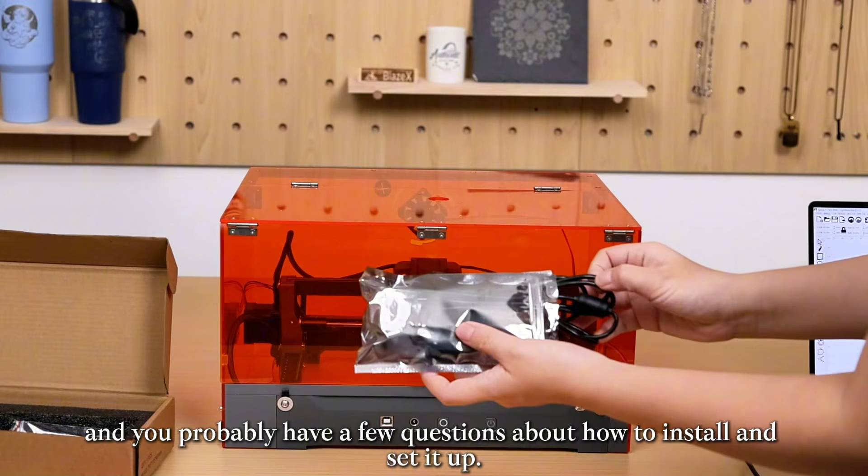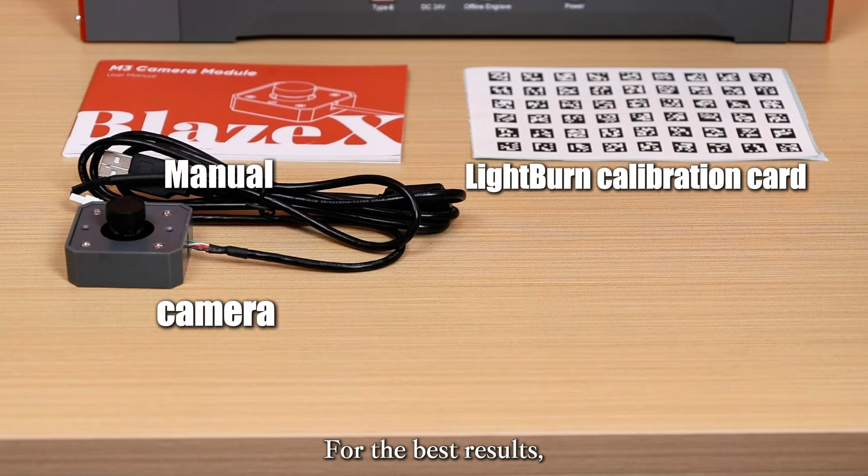By now, you should have received your camera, and you probably have a few questions about how to install and set it up. So today, I'll show you how to install, connect, and calibrate your camera. Let's get started. Before we begin, prepare a camera, a USB cable, and a LightBurn calibration card. For the best results, we recommend a calibration card around 4 by 6 inches.

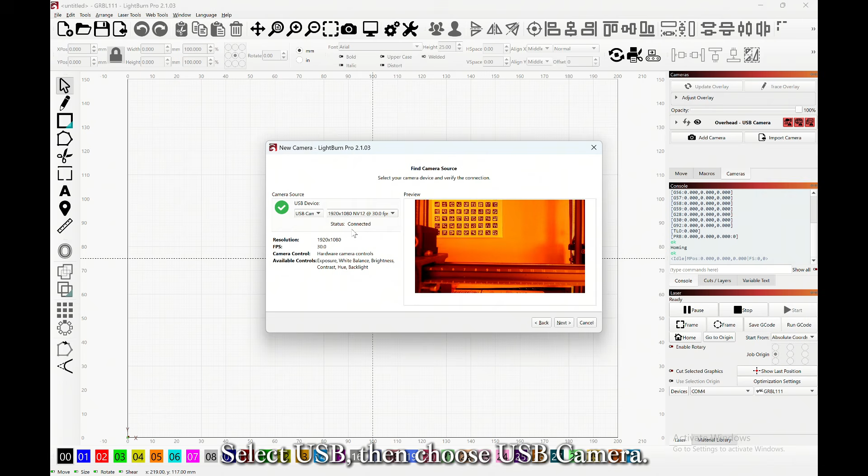First, mount the camera onto the machine and connect it to your computer with the USB cable. Open LightBurn and make sure you're using the latest version, LightBurn 2.1. Go to the camera panel and click Add Camera. Select USB, then choose USB camera. Once you see the camera feed, click Next.

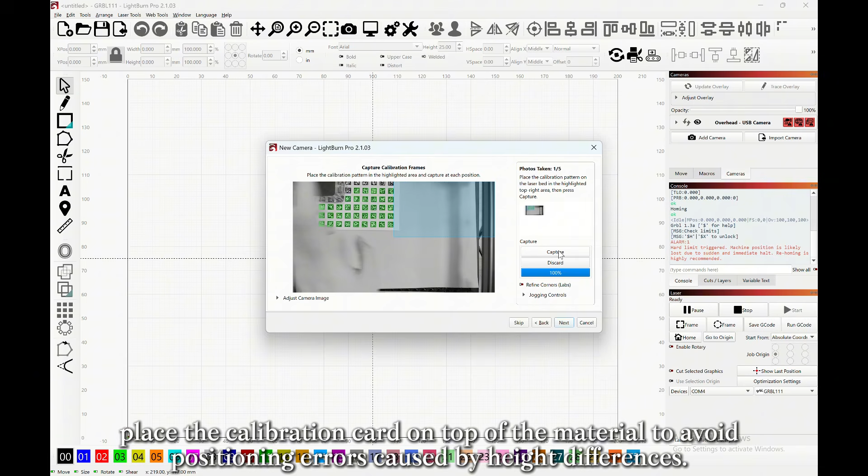Then select Create New Lens Calibration and follow the instructions. You can also click Print Calibration Card if you need to print one. If your material has some thickness, place the calibration card on top of the material to avoid positioning errors caused by height differences. For thin materials like craft paper, you can place the card directly on the honeycomb bed.

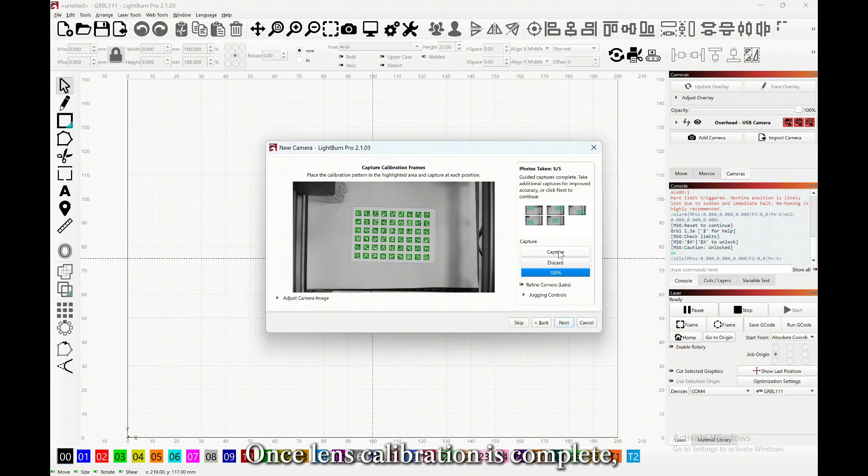Follow the positions shown on the screen and place the card in each area, then click Capture. Make sure the camera can clearly detect the calibration pattern. If it can't, the capture button won't be available. Once lens calibration is complete, we need to align the camera view with the laser position. LightBurn offers two options, automatic alignment and manual alignment.

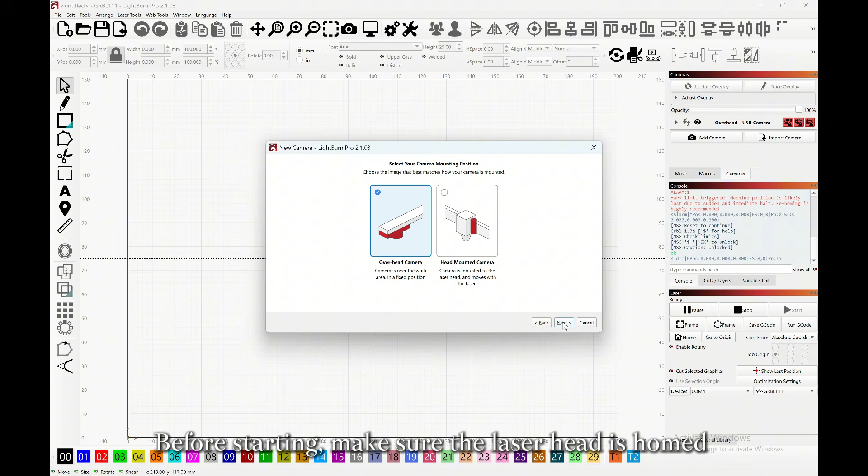Next, select Standard Camera Model, click Continue, and choose Overhead Camera. Before starting, make sure the laser head is homed and the coordinate mode is set to absolute coordinates. This is important for accurate positioning. For a faster setup, let's use automatic alignment. Click Automatic Alignment. LightBurn will engrave 4 alignment points: 1, 2, 3, and 4.

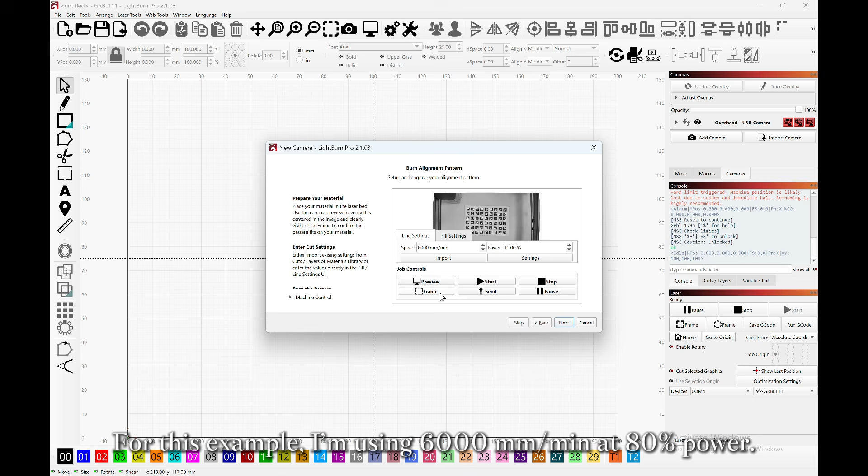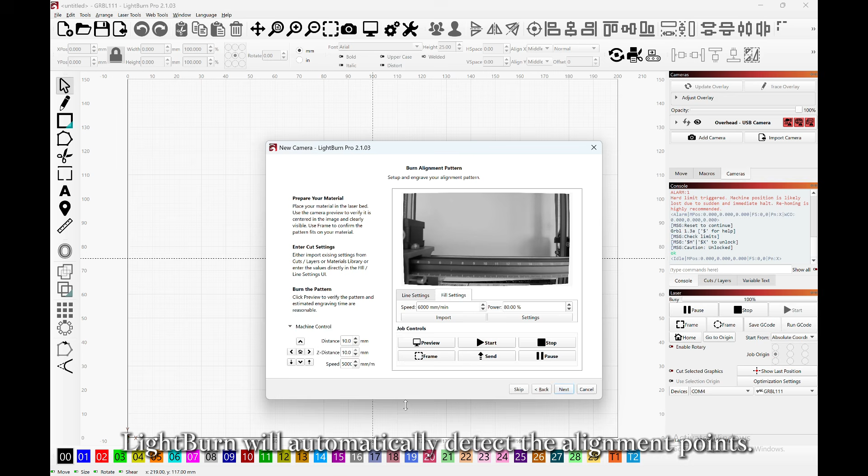Adjust the speed and power based on your material. For this example, I'm using 6,000 millimeters per minute at 80% power. Also, set fill settings to match line settings, so LightBurn can recognize the alignment points more easily. Click Home, then Frame to check the engraving area, and click Start. Once the engraving is finished, LightBurn will automatically detect the alignment points. And that's it, your camera alignment is complete.

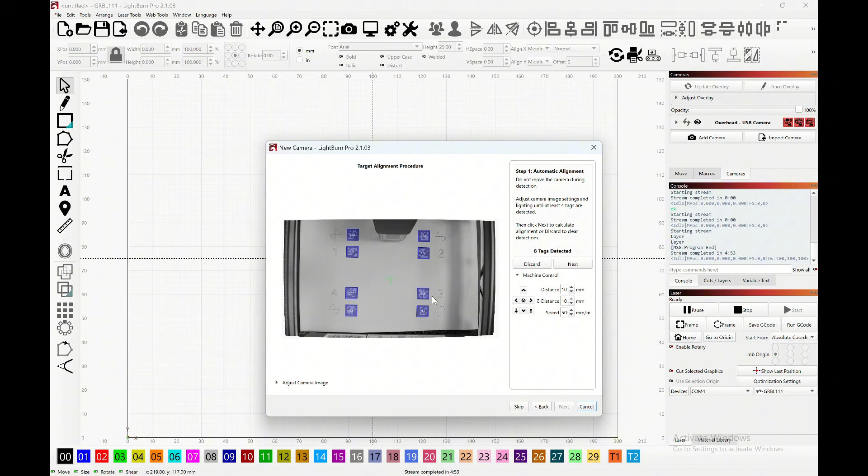Let's test it with a simple square. Adjust the parameters and start engraving. And look at that, a perfect match.

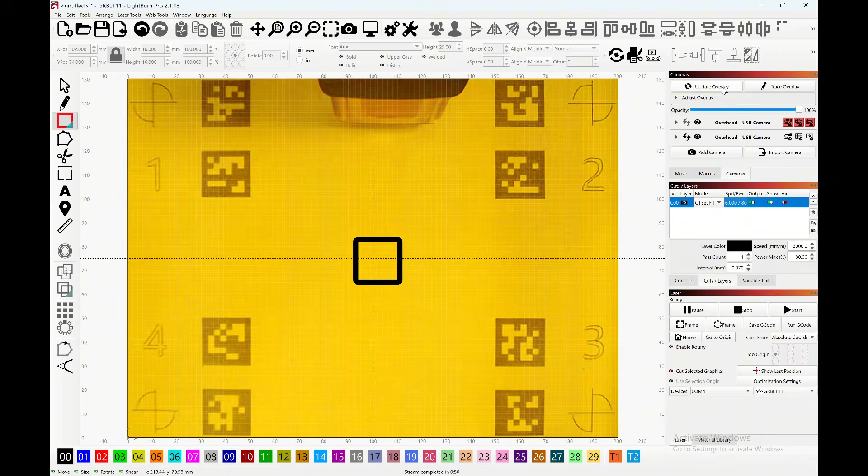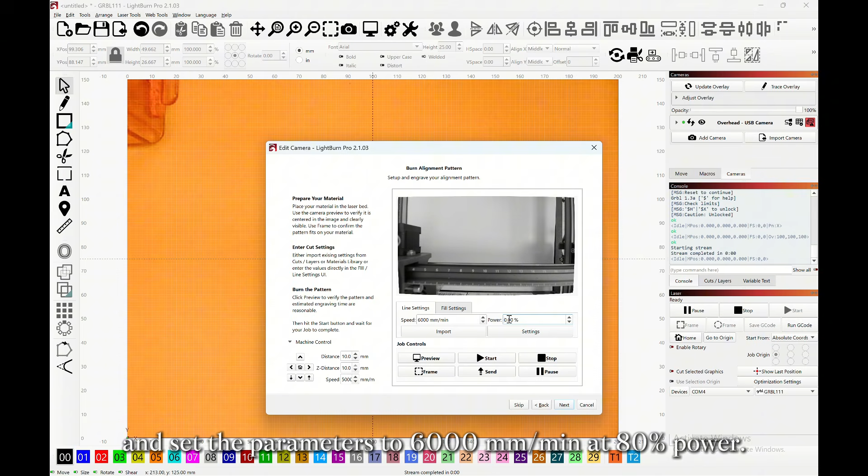You can also choose manual alignment. First, engrave the 4 alignment points. Click Home, preview the engraving position, and set the parameters to 6,000 millimeters per minute at 80% power. Then start the engraving.

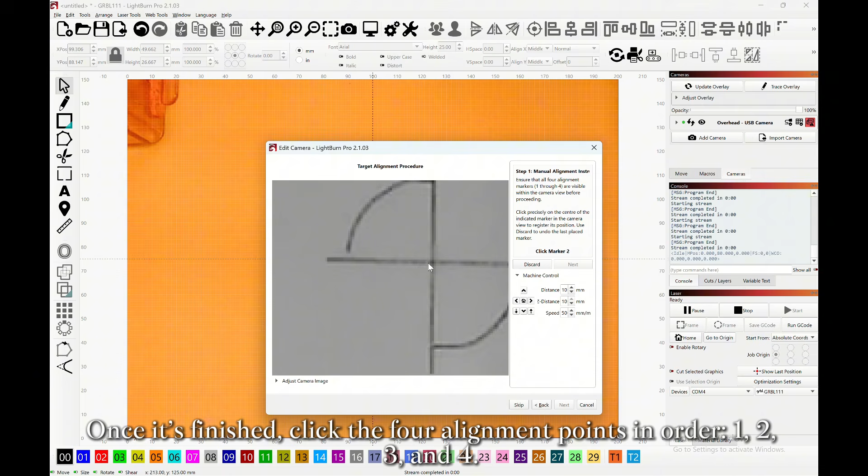Once it's finished, click the 4 alignment points in order: 1, 2, 3, and 4. Make sure each point is clearly visible in the camera view. Once all 4 points are selected, the alignment is complete.

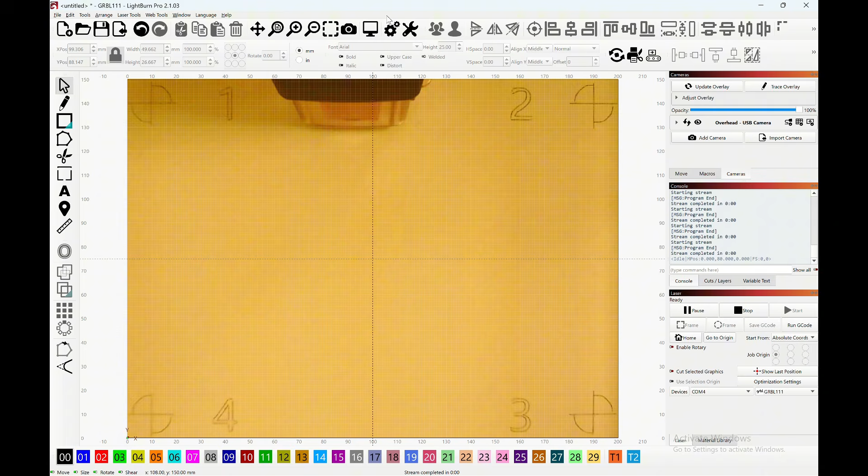Let's do one more test. Place a piece of felt inside the machine, import your design, and adjust its size and position. Perfect match! And that's it! Your camera is now calibrated and ready to go.